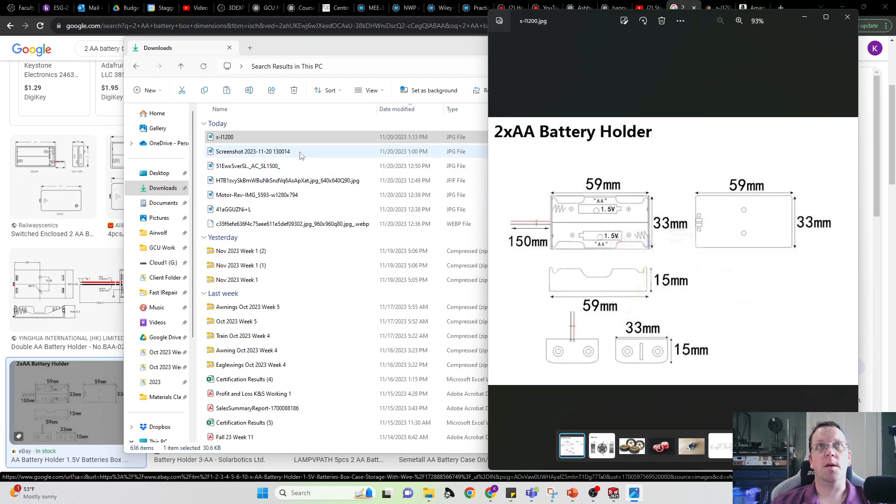I've added a number of different materials, so let me pull those up, along with a number of specific drawings. So, AA battery holder—this one's a pretty important one. A lot of you are going to have to account for this in your volume, and you're going to have to make each part in your team. Now you'll have dimensions for these attached to the announcements.

Similarly, the two-wheel drive wheel—these are roughly the same size as everything we're using. You should expect them to look something like this with black tires, so they're not going to be as nice or fancy as these injection molds, but the tires are going to be the same model as this, unless they've started doing more 3D printing of tires, which I kind of doubt has taken place yet.

We have a kind of simple three-spoke design similar to this. Maybe we have some more options—we were starting to experiment with 3D printing wheels the last time I was involved in the project.

This is what the actual motor, the dual drive motor, looks like that you guys are going to be using. I've given you some specific motor dimensions here. This is a side view—you have positive and negative on either side of this. So you have a couple of key parameters.

2 millimeters here is your shaft diameter. 6.1 millimeters is this front coupling, so this shroud over the front—6.1 millimeters outer diameter, 6.15 actually, and then a 1.7 depth.

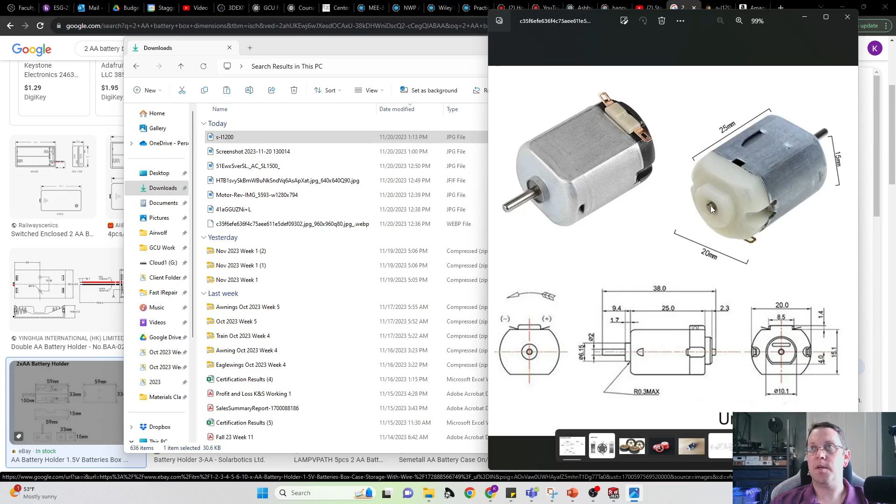These are important figures to know because you need to have something that the front of the motor butts up against in order to hold it in place, and then something that holds onto the back as well. The back looks like this, and across all models and types, the difference is how far the shaft sticks out if it's a double-sided drive like this one or not.

So neither of these account for the dimensions, but the numbers on this one were a lot more clear. The overall dimension is going to be a little longer—A is going to be longer for the double-sided drive. It's 38 millimeters for the single-sided drive, but this is about 9 millimeters instead of this little 2.3. So another about 9 millimeters out the other side, 9.4 or so, will get you about the correct dimension here, and that'll give you a reasonable range for fitting parts.

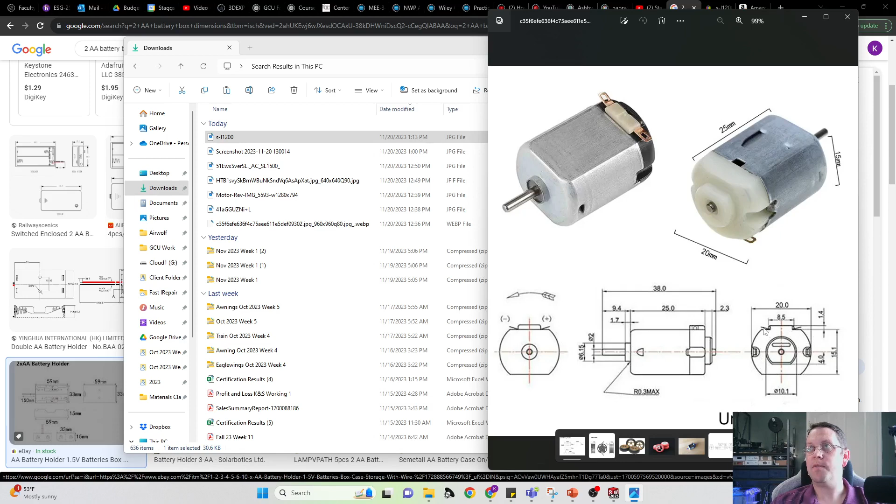D shape, so 10.1 millimeter diameter with a 4 millimeter cutoff to the D shape. All of this stuff is stuff you guys know how to do. The actual height of the motor itself is not completely round, so it is 20 millimeter diameter, but it's not actually a diameter—that's actually the width. So these are arc segments. Getting the curvature of these right is a little tricky, so you need to pay attention.

This maybe does a little bit better job of representing it, but that's kind of your starting point—15 millimeter height. You'll have to do some matching to see, okay, does that angle look correct?

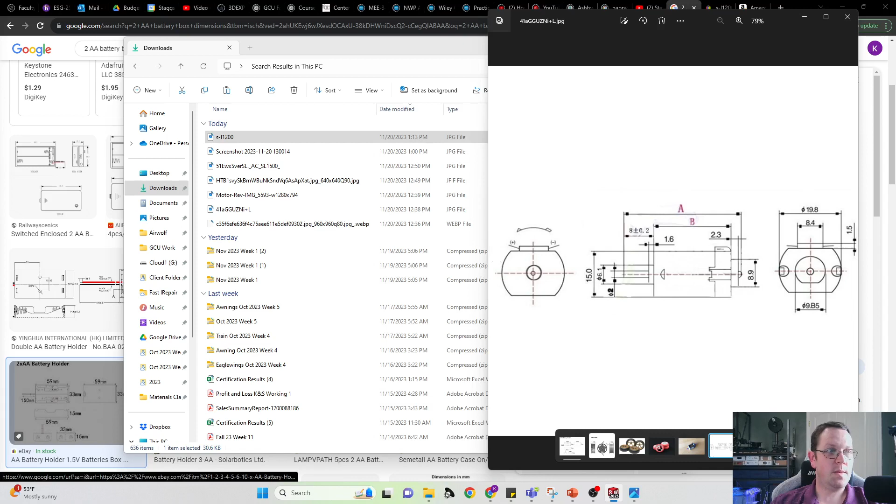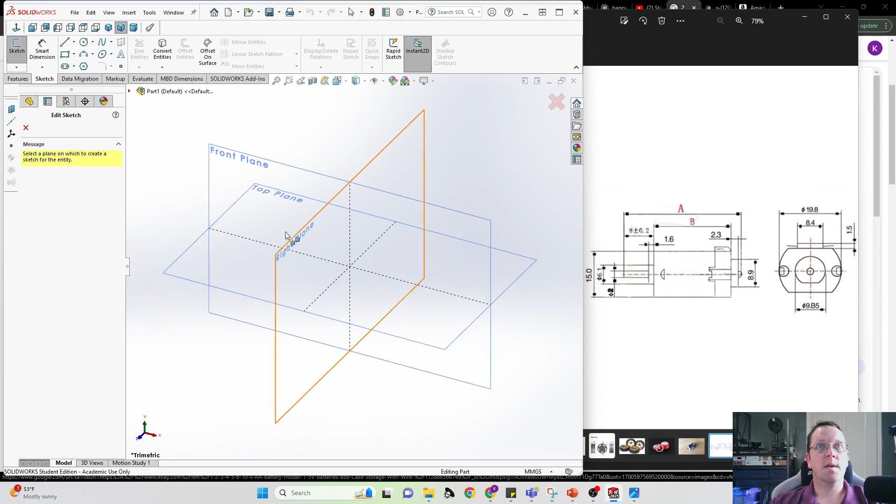So when you go to draw it in SolidWorks, the trick is going to be something like this—even if I minimize this just a little bit to give us our reference. Even if you're drawing that, you're not really going to be served well by adjusting our view plane so it's square, or by doing a set of circles. You can kind of do a set of circles referencing maybe the midpoint of the rectangle or something like that.

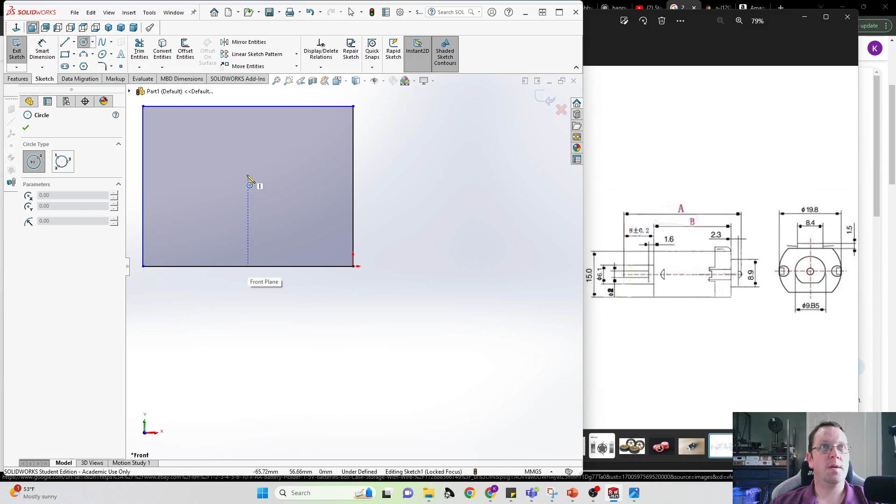Sometimes SolidWorks is there to help—there we go, it's got my reference, so I'm going to set it there. We've got one circle, and then instead of doing another circle, what you're actually going to want to do is set the arc points. So, smart dimension: set this height as your 15 millimeter, set this width as your 19.8.

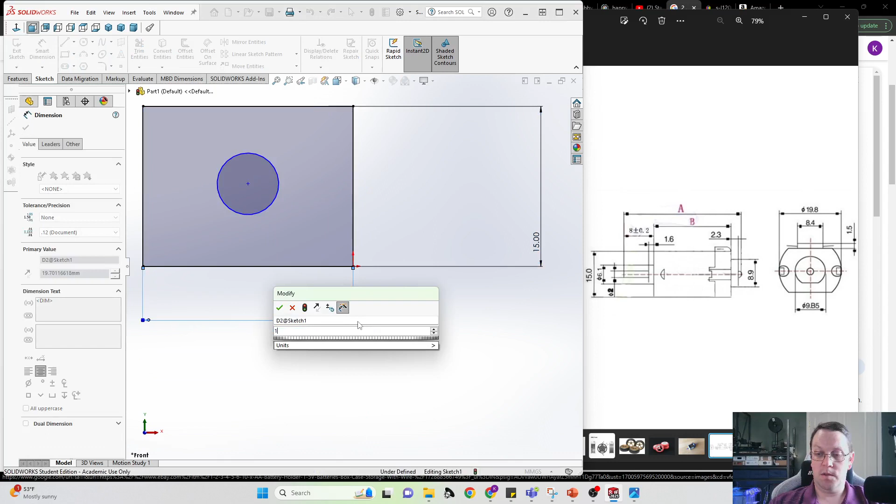This diameter is going to be on the real motors, it's actually going to be closer to 10.1, so maybe this is slightly more accurate. So, 10.1.

Diameter, and then a flat cut at 4 millimeters down. So a flat cut here, let's see, yeah, 4 millimeters down.

And this will let you do a cut to this. We also want to have a distance here. This is going to be right at, let's see, half, so it's going to be about 7.5.

Back into the smart dimensions. We're actually making movement, so we're going to be right about 7.5 millimeter, so that it's at the center. Then we're going to come in and trim entities, so that we're left with the geometry of interest, something like that.

And then to recreate those arcs, what you'll see is these arcs are related to these, so we know what the curvature is going to look like. It'll still be easiest to do like a 3-point arc, something of that nature.

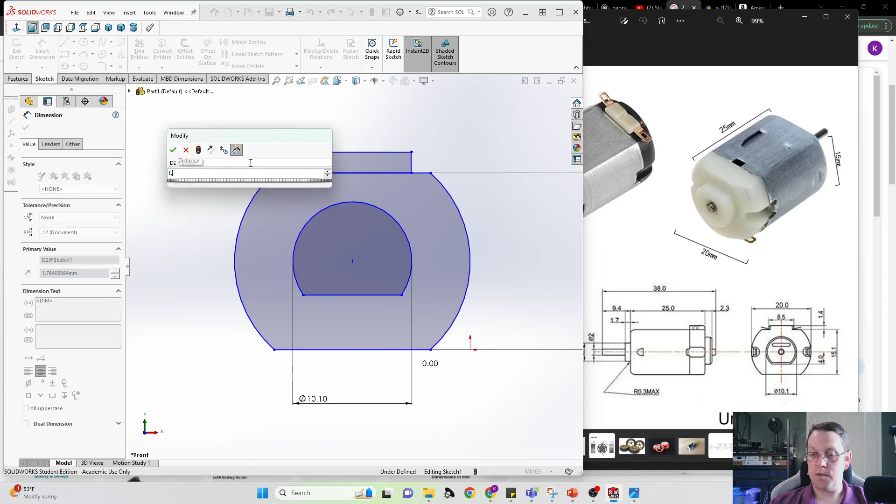And so here, even if this is 1.5 millimeters tall or so, which, yeah, I think the real one is actually a little closer to 1.5, which I think is what this says.

Yeah, nope, those are totally other components. Come on now, I don't have time for this. There we go, yeah, about 1.5 is actually more accurate for these.

So about 1.5, and total width about 8.4, so I'm going to say about 8.5. And the distance here to here, 8.5 over 2, so that it's centered.

And then we have our components. So now the only thing we're missing is that 2 millimeter shaft.

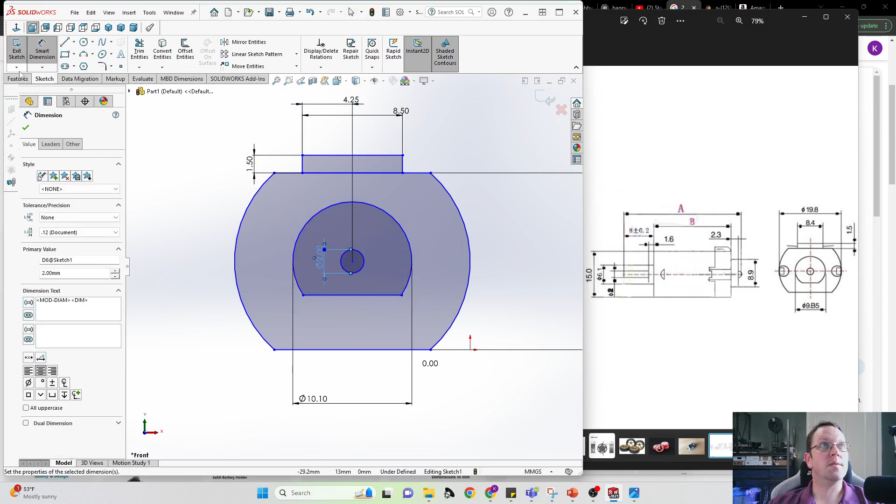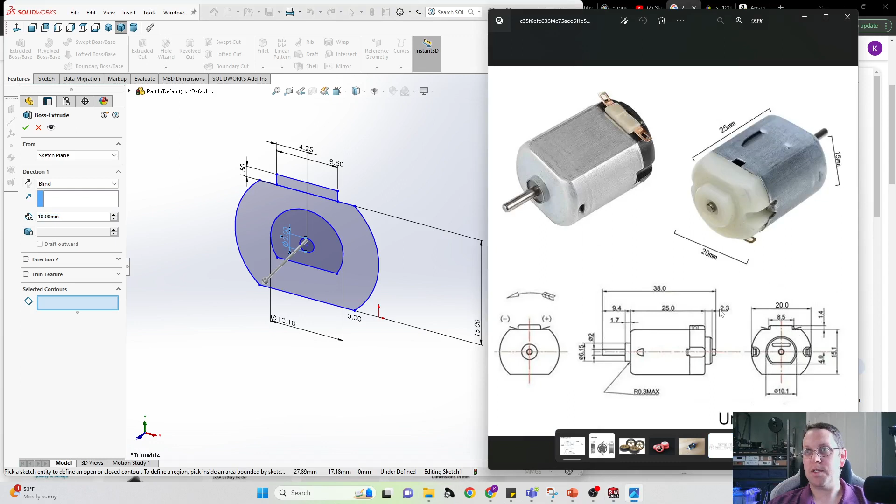So 2 millimeters. All right. Then we extrude this. So this overall length is the entirety of B. So for almost all these motors, it's the exact same 25 millimeters. So we're going to extrude this section, 25 millimeters.

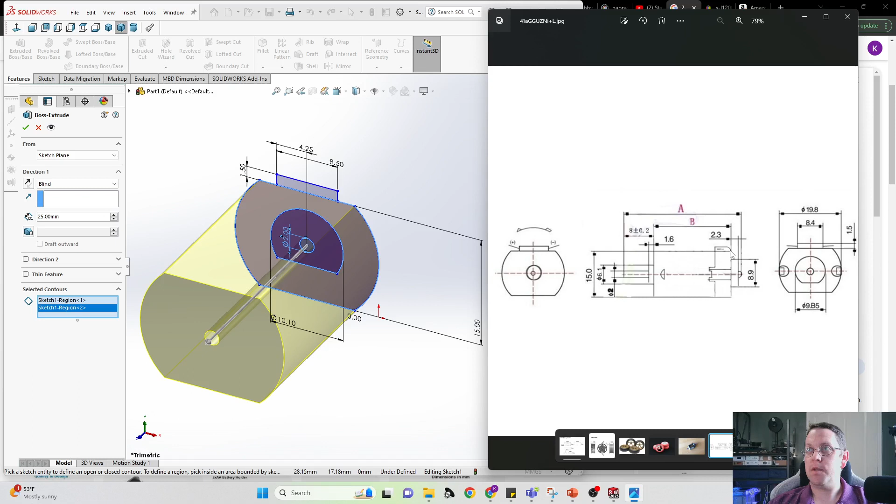This top piece only extends by, let's see, I don't think either one gives it, only extends by about this much. This is about 6 millimeters or so. So we'll start with that. Do another extrusion. So the top, since this is a little bit of a trickier part and you guys can't just go in and lay hands on parts yet, I need to verify that we've got all the stuff that we need.

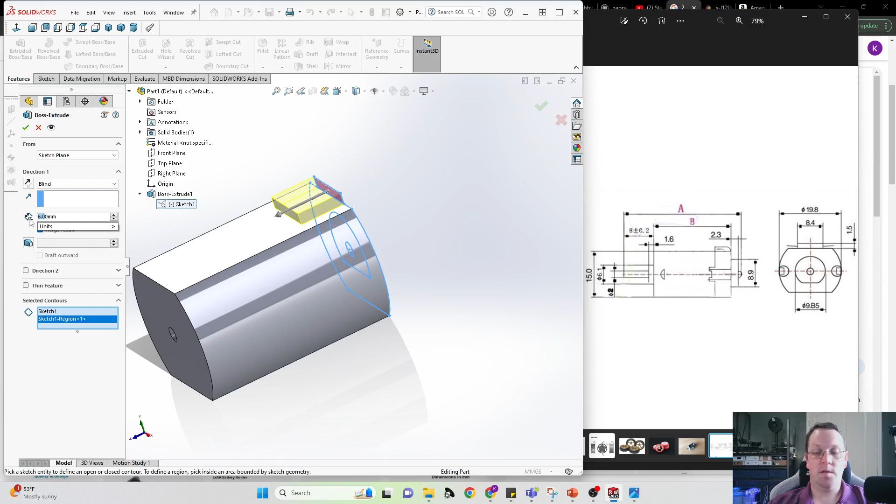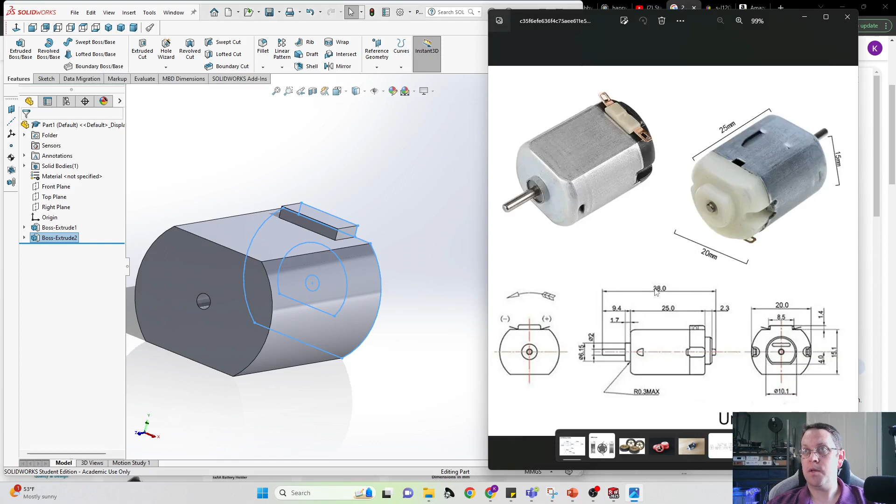Actually, it's going to be a little narrower. It's actually going to be closer to about 4.5. Yeah, that's about right. 4.5, roughly in that dimension. Overall length of that shaft is going to be from the back plane here. From that back plane, it's going to be about 34 millimeters, roughly. So extrude this central region, sketch 1, come on. This region, 34 millimeters.

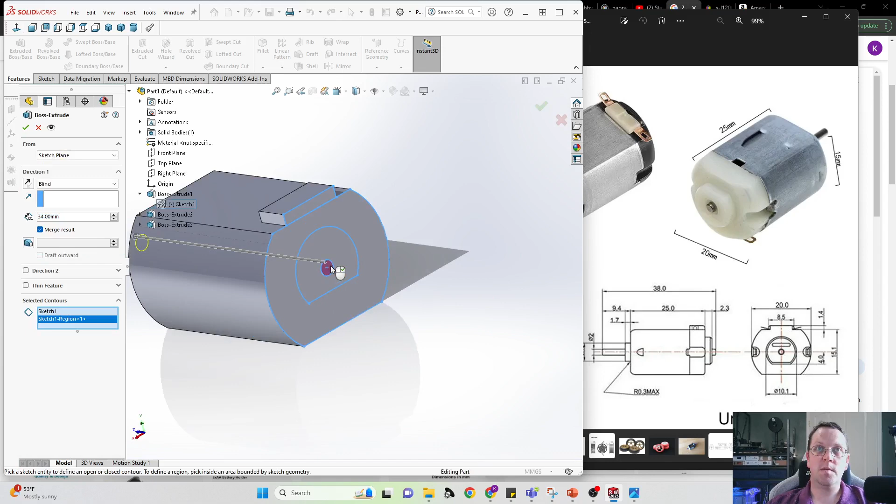So about 34 millimeters. And then another about 12 millimeters or so out the back, give or take. The backside's typically just a hair shorter, so we'll see if 12 is pretty close. Reverse direction, it's actually going to be about 10. Yeah, it's actually probably going to be about 10 because you also have the protrusion at the back there. So about 10.

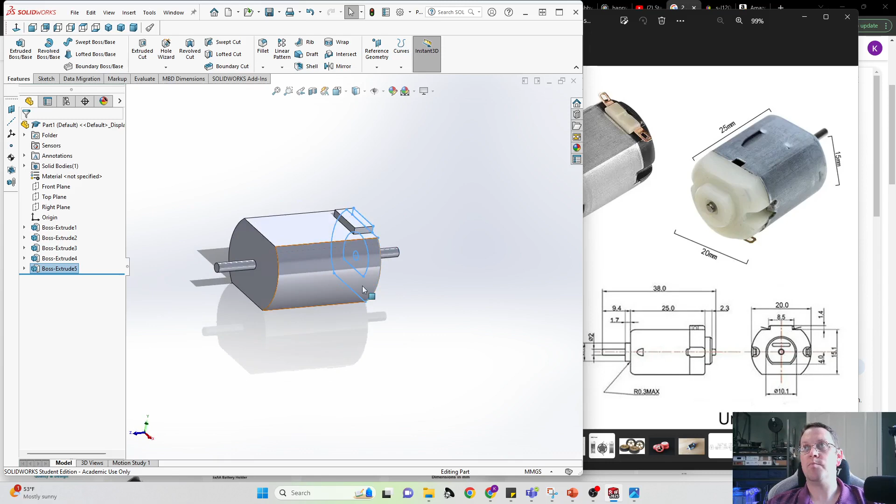One more extrusion of this base, other direction. And so this is another about 2.3 millimeters. So that's more representative of about what this motor is going to be in practical terms. There's some filleting and rounding and things that you'll be able to account for, but for the most part, this is your basic geometry for the motor. So I'm going to go ahead and save that into the group of files.

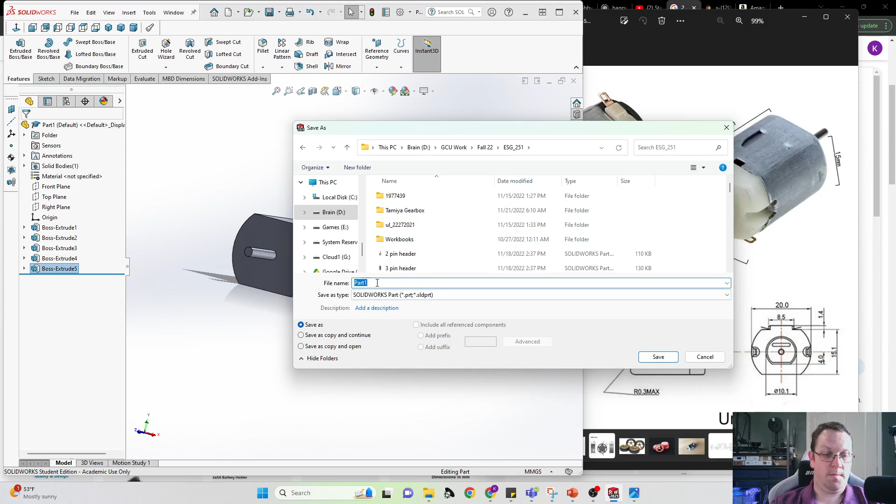Actually, so I'll go back and figure out where I've got the rest of those saved. So it might be 18. Yeah, might be in here that I've got some more of them. Anyway, we'll do... Yeah, so I'll save this to where I've got a couple of the other parts, the Tamiya gearbox and some other things, which actually I thought was here. But maybe is not. So maybe it's a different one. Interesting. Okay, here we go. So, motor, make sure that's saved.

Anyway, you're going to go through, you're going to get a couple of these parts made. So that's going to look a little more like this. So a little longer on the front end, a little shorter on the back end. You want to account for that small protrusion in the front as well. So that's factored into this length. Fairly representative of the part that you see there. There's some filleting that you can do to the front. That'll get you a highly accurate part.

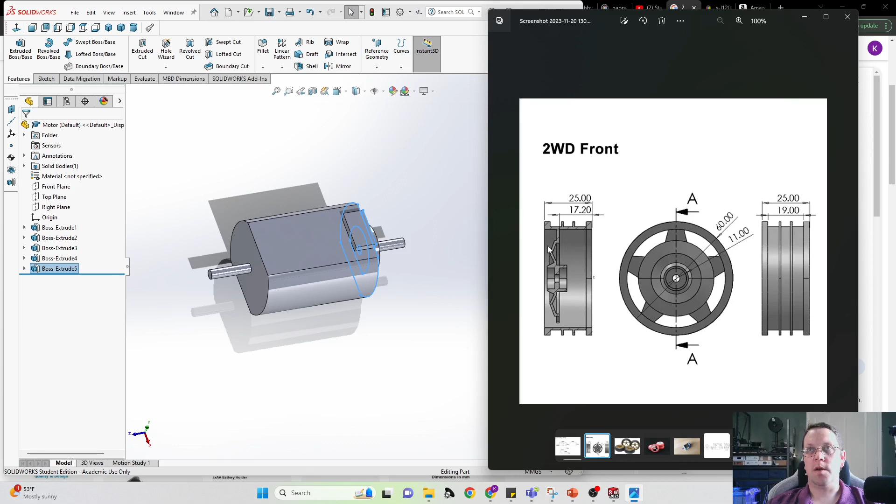You're also going to find wheel dimensions. So this is about right, roughly not quite an inch wide, but close. About 60 millimeter diameter. The design is going to be a little bit different, but this will give you more or less approximate dimensions, including sort of rim face area. So what's called the back spacing on the wheel. That's about right for a lot of the rim designs. So that should be pretty accurate for what you've got.

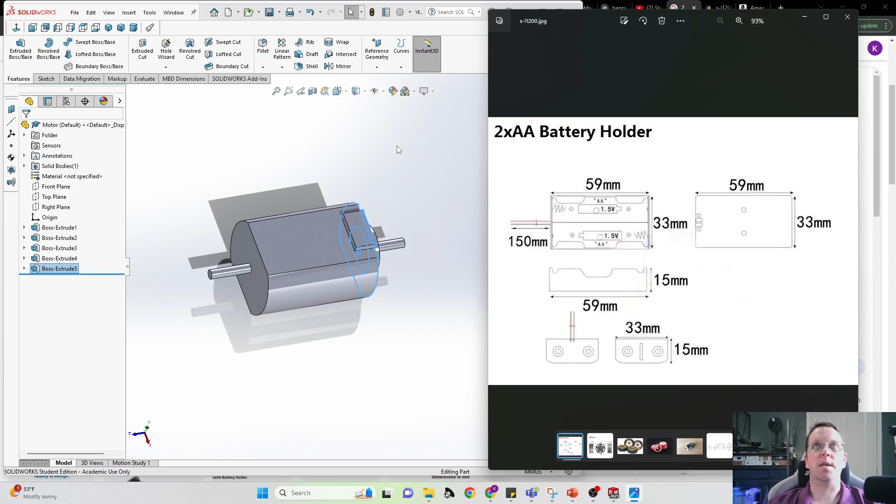And then create your battery box. These edges kind of curl up and around and match this curvature. So things to keep in mind. This will at least give you a pretty good idea what the dimensions look like. And then you're going to put together your chassis. So keep in mind here again, when you go to do chassis design, simple things that you can do to reduce the amount of time that it takes to print, and more importantly, reduce the likelihood of failure, is start with

something like a rectangle, have another rectangle off the top, and then do some rounding of things. Then you're also going to want to do across the whole back edge. Maybe it's even on this outer edge, in order to give yourself some material to work with for heights on gearboxes as well as axles. You're going to want to do something like these bars all the way down. And for your motor mount, you might want to do some kind of offset block for your motor mount.

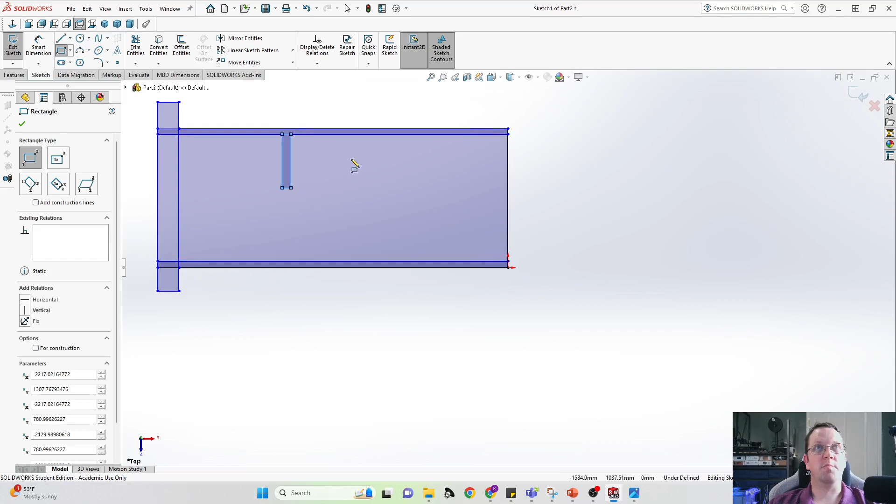And then you'll have a forward section, maybe like this, for your gearbox, a matching section back here for holding up the gearbox. So you might have something of this general variety. Some of the tricks are going to be keeping in mind at the back, for instance, you might not have enough room.

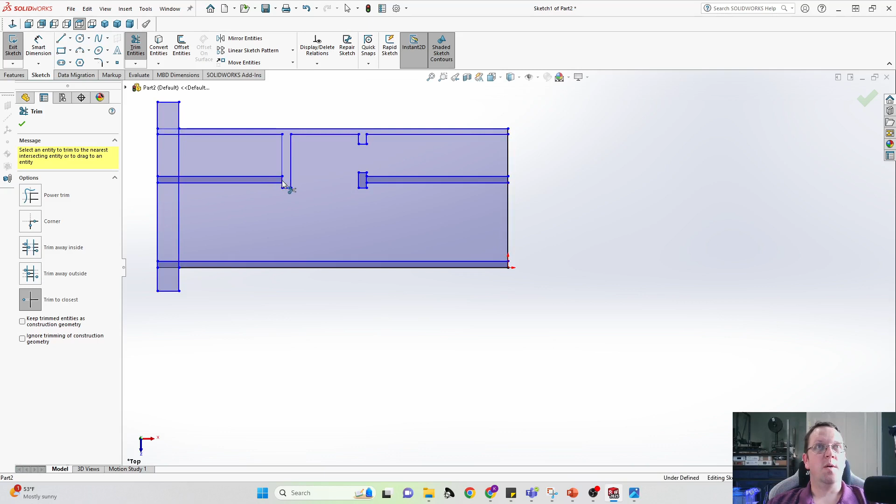So you might have to make a cut here and make a cut here. And then trim these two pieces out. Trim that out. Maybe not trim that out. And what this will do is this will allow sort of one continuous part. So you do extrusion. This whole plate really only needs to be about 3 millimeters thick.

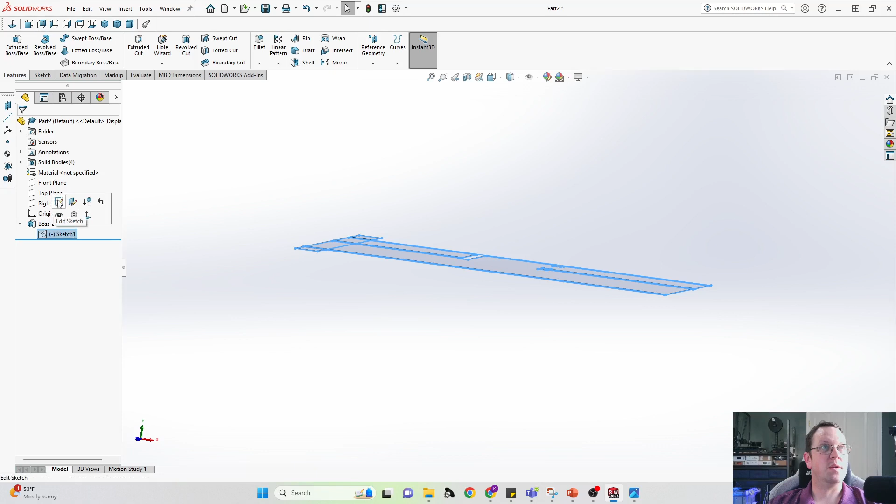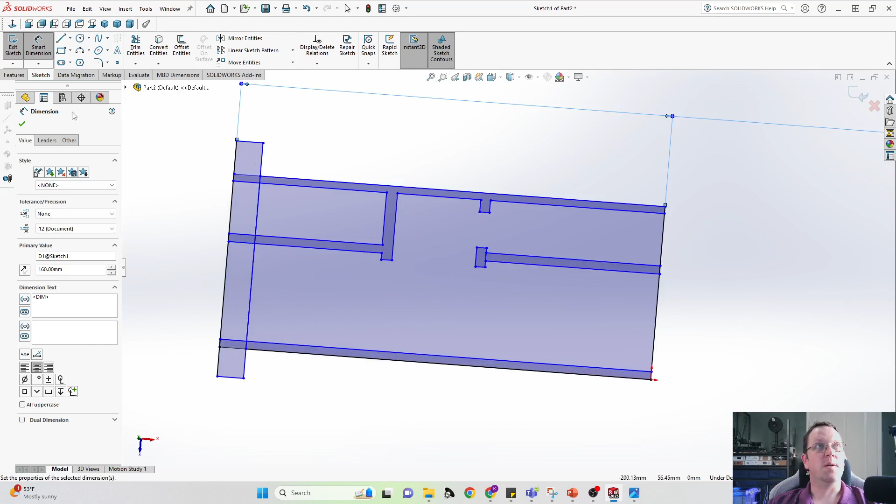We're going to reorient the total dimensions, kind of go back and edit this sketch, and the whole thing has to be less than like 170 millimeters anyway. So if we rescale this to be 160 millimeters in total, then when you lose your part, you go back and hit this button, zoom to fit. There we go. Exit the sketch. Now we have our base plate.

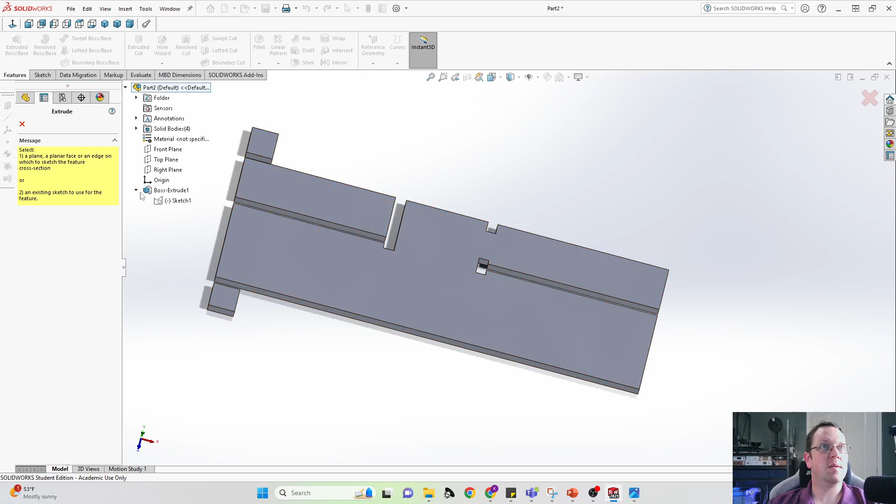Now what we can do is one more extrusion and create our walls for mounting axles and all the other components. So we come back in and we grab these regions, no thinning feature. So we grab this region, this region, this one, this one, this one, that one again, grab this one, and this one. Now, if we bring those up by, I seem to recall you need something like 15 millimeters or so. So get rid of this contour. So there we go. Something like 15 millimeters gives you something to work with.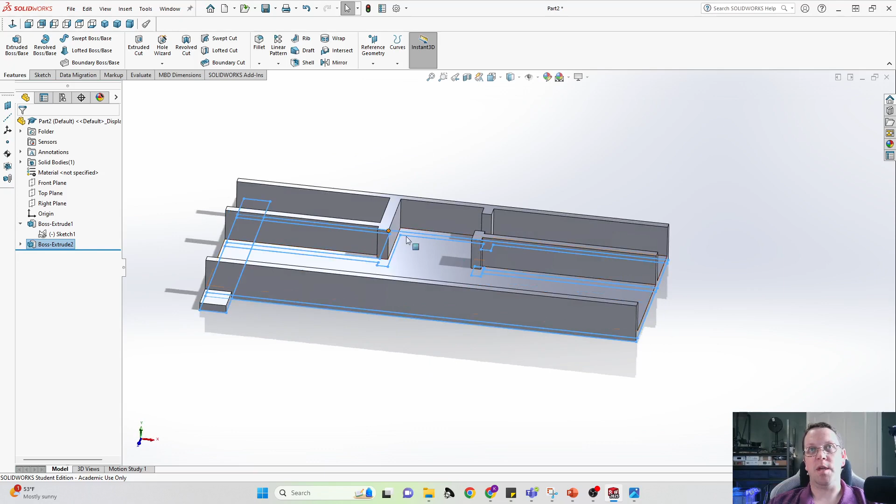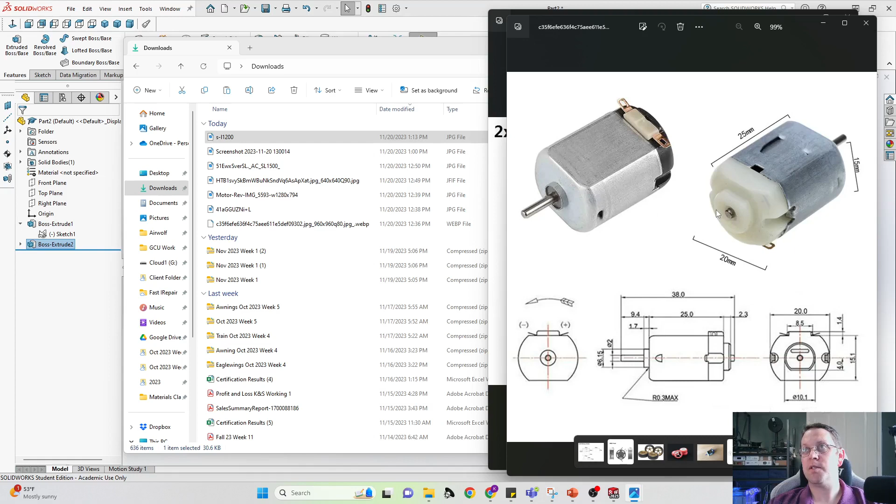And then more importantly, what this does is this allows you a space to drop the front edge of the motor in and slot the back end down into place, but have this spacing be kind of a friction fit so that you don't have to use a lot of glue or anything like that. So the front nose of the motor right here will drop into a circular hole designed to be kind of a snug fit. And then the back end will be designed to just barely touch either side of this. And it'll be a real snug fit. Plus, that'll mean this chassis prints quickly compared to a lot of other designs.

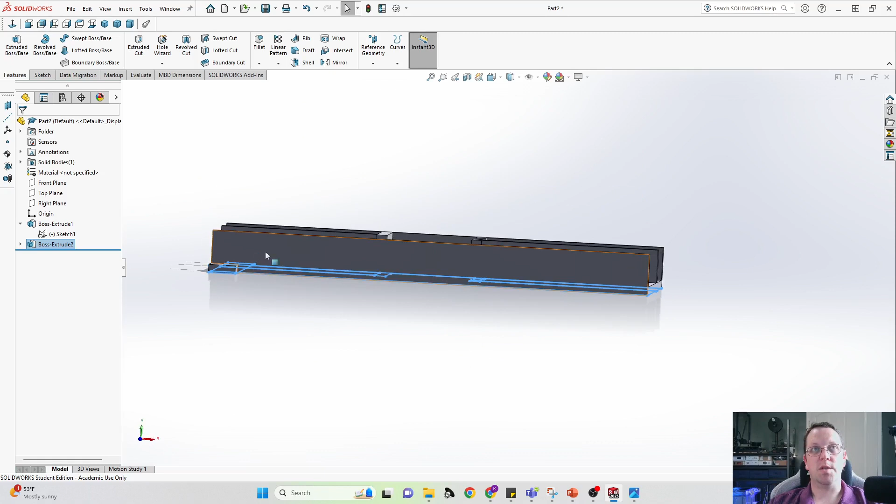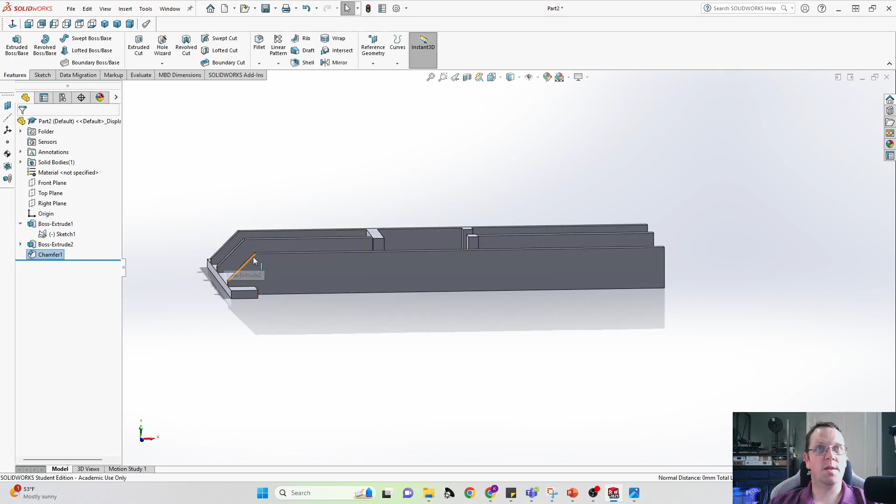And then you'll also have to do some cutouts for where the gears are going to be on the bottom. That's fine. But if you position things low enough, you can also do things like taper these front edges. So you can do a chamfer on these front edges. So not that one, but this one. So you can do a pretty aggressive chamfer on the front as well as on the back to give you some clearance for body stuff and whatever else. There's a lot of options for how to do that. So you very quickly get to a sophisticated design.

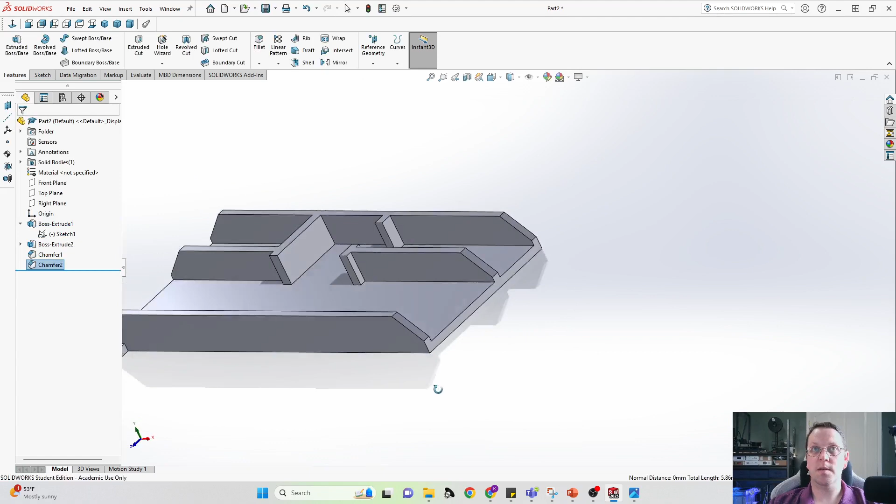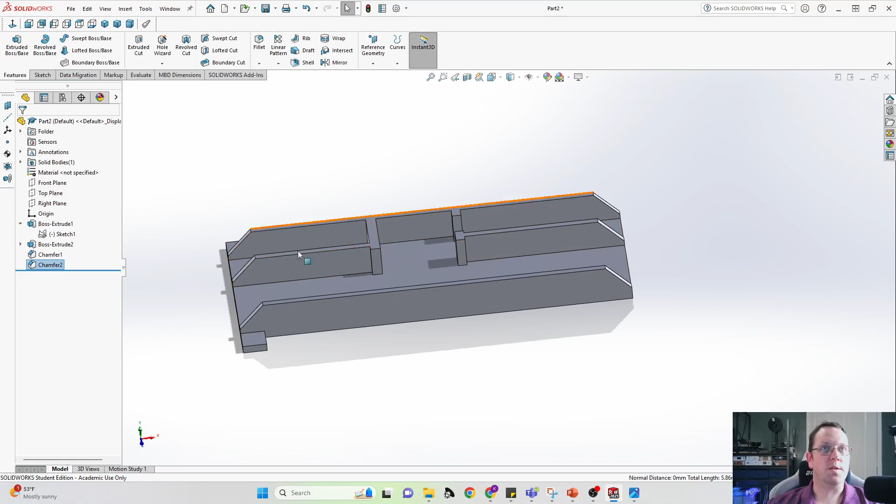Chamfer there. Okay. You very quickly get to a sophisticated chassis design, and then you just set up your through holes for your gearing. Make sure your spacing is correct. Make sure you've got just enough clearance where you want the holes to be almost like a real snug fit. You don't want them to be loose and flopping around because you don't want to have to come in with hot glue and make a royal mess. And what that does is leaves you a lot of room on the other side for your control board and for your battery box up here.

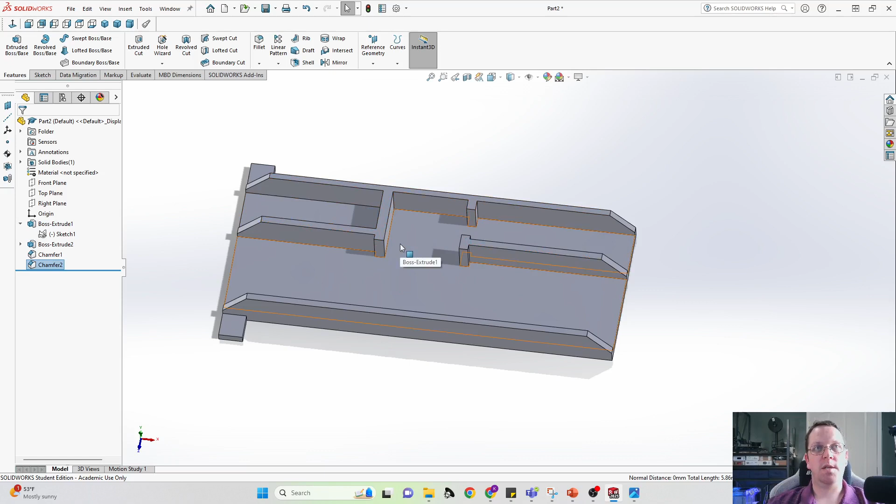So you might have to orient things a little bit carefully, but this should give you enough of a clearance starting point that with the dimensions of the battery box, the motor, and some of the other things, you can start putting together a template for what your chassis will look like. And then for the body, what you want to do is get some key measurements and then design that over the top of your particular car.

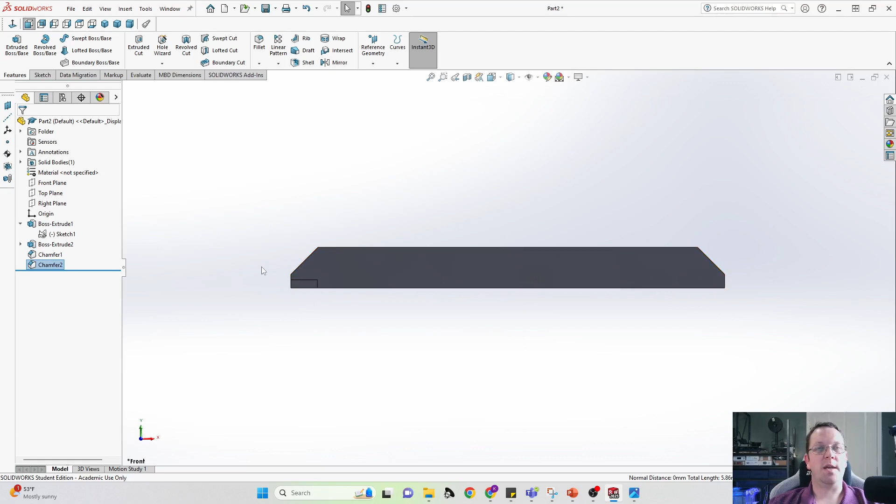So you could very quickly do something, because a lot of students don't really understand, well, how would I do that? Well, you would start with something like the dimensions of this in the back end, and you would do another sketch, and let's say we do it on the surface of this.

So we start a sketch and we say, all right, maybe we want it to look something like a 30s Roadster or something extreme, and we want it to look like something out of a cartoon and have wild flared fenders like you might see in some kind of crazy Bugs Bunny cartoon, or have it come up to a crazy point because race car.

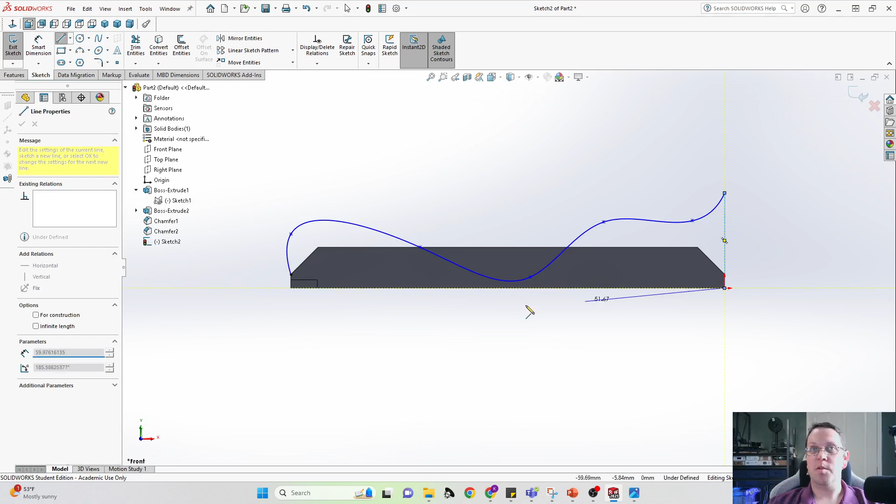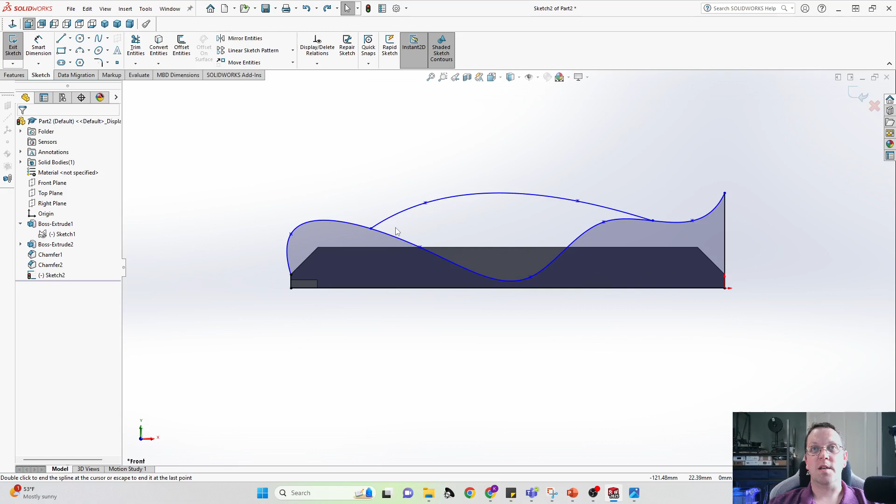So you bring this forward and up, and now you have an enclosed space, and you have maybe two portions of this. And because we're doing 50s car styling, maybe to give you enough clearance, you need to do something. Let's see, let me go back to a spline or some kind of curved geometry. So maybe you want it to look something like a stylized version of a Roadster or something, right?

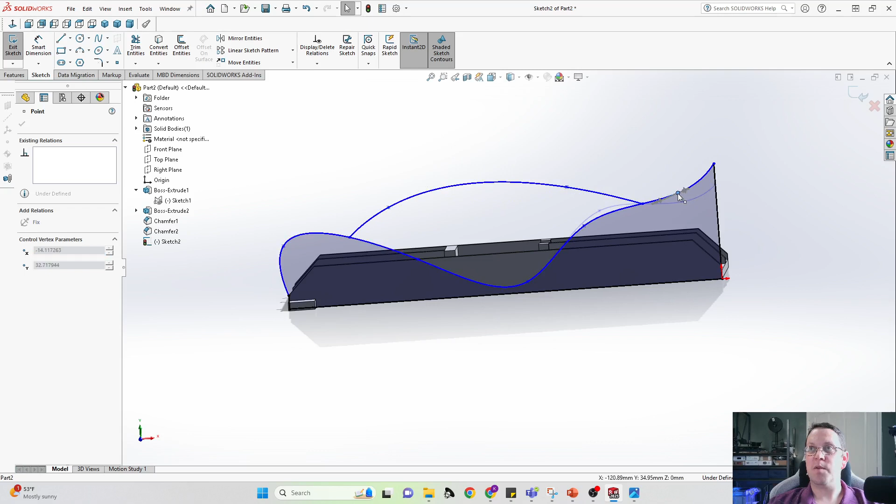What you can do is an extrusion of this geometry, and you could cut the pieces of this that you don't need. So you might need a little bit more space at the front edge in order to get the room that you need to clear gears or whatever. Maybe back here it's the same kind of problem. You need to bring it up. Maybe the same thing is true for this, and it needs to be a little taller to give you some more clearance for gears. That's fine.

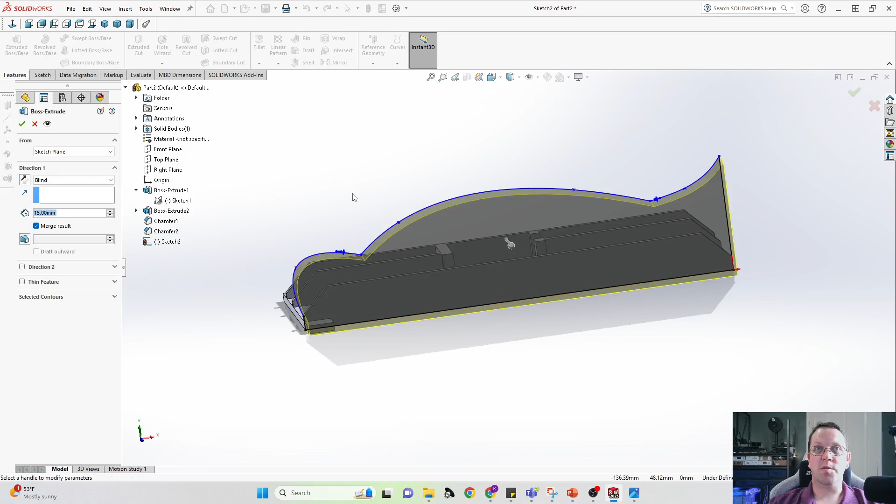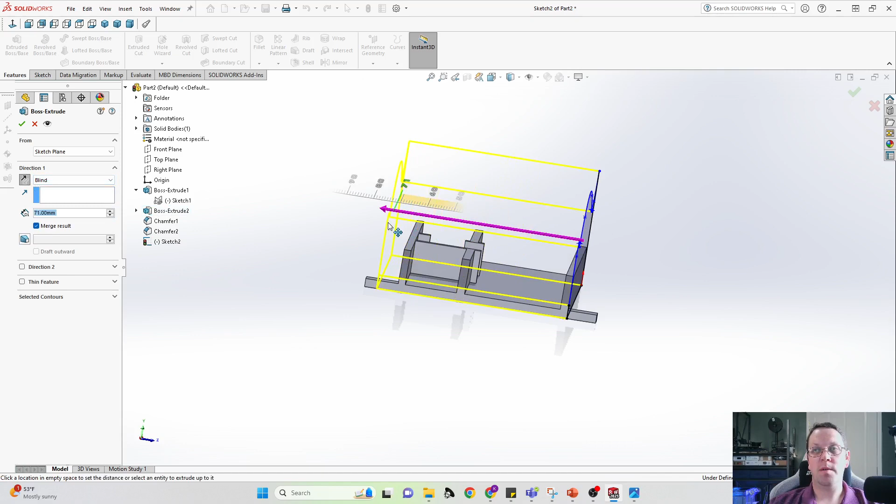So then you can come in and trim the internal entities, do a simple extrusion. So you could do an extrusion of this all the way across, up to this surface. And what you could do is actually make it just a little bit wider. So change it back to a blind extrusion and give yourself a little bit of room internally. And then you can do a shell with a couple millimeter thickness or something of that nature.

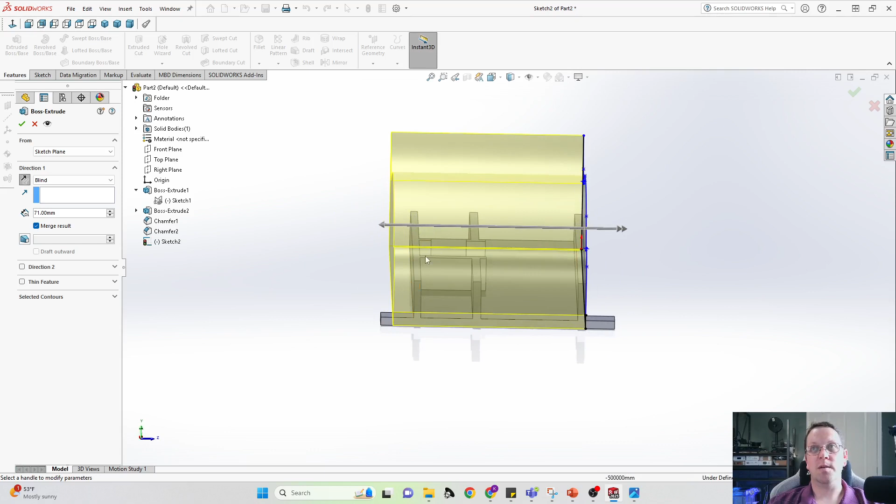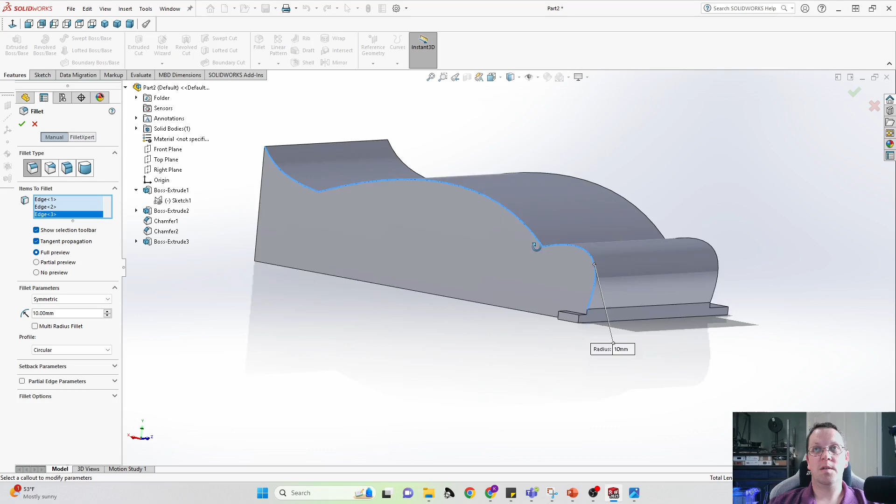But you would then need to do some sculpting on the sides, and we can show how to do that in a reasonable way. So if you did this, now we come back in, we do some filleting along that curved edge. And it might only understand how to do this in single digits. You may not be able to do something extreme. 10 millimeters probably compromises the geometry. 4 is too much. 3 is too much, but it understands 2. So 2 millimeter fillet on that side.

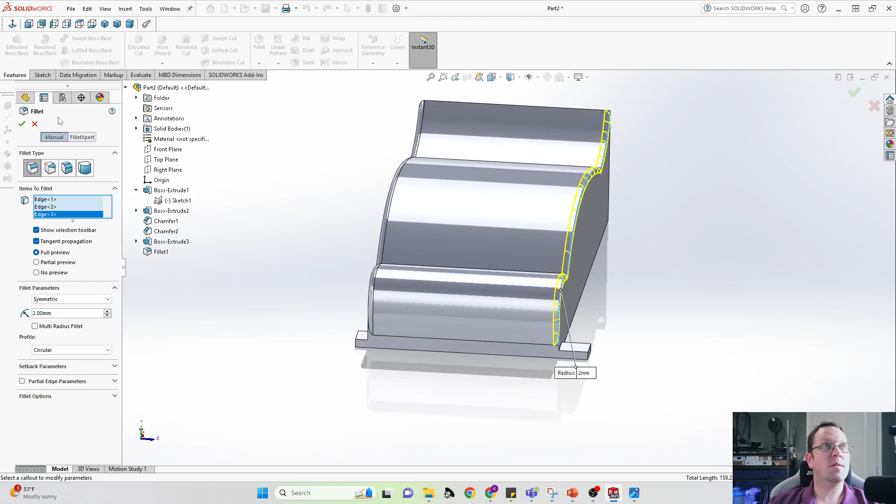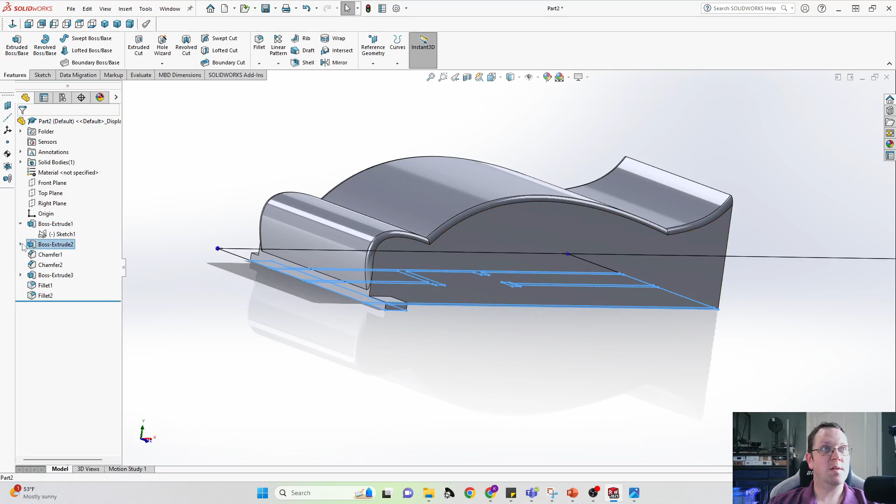Same thing. Fillet again, 2 millimeter on all of those edges, to round the edges of the body just slightly. Maybe up front here, you wanted a little bit more, a different profile. So we go back to sketch 2, edit that and say, I really didn't like that. Maybe I wanted to drag this in and have it be more race car. Something like that.

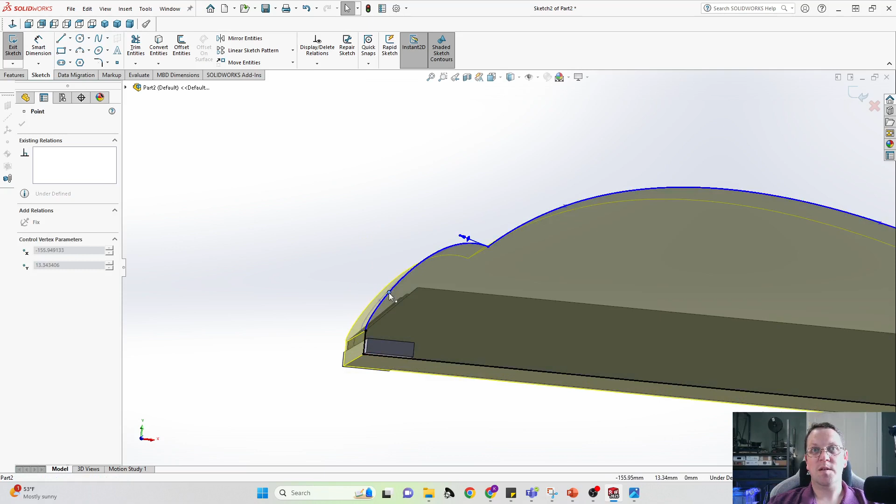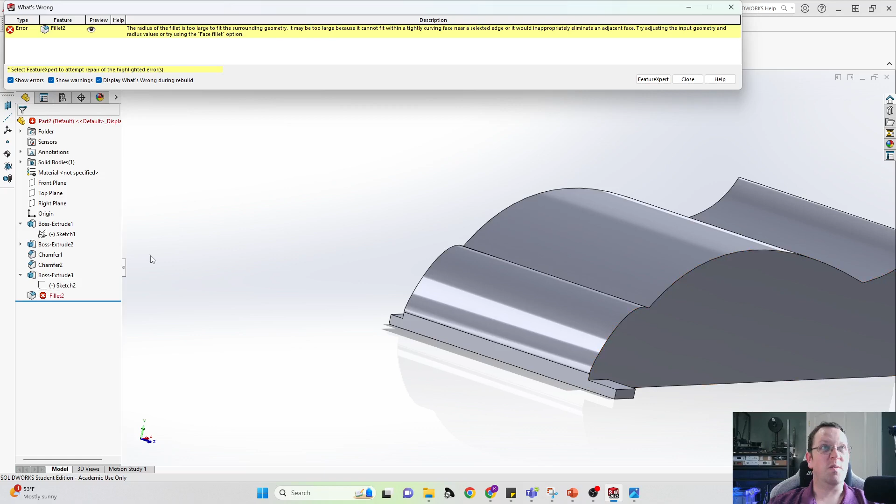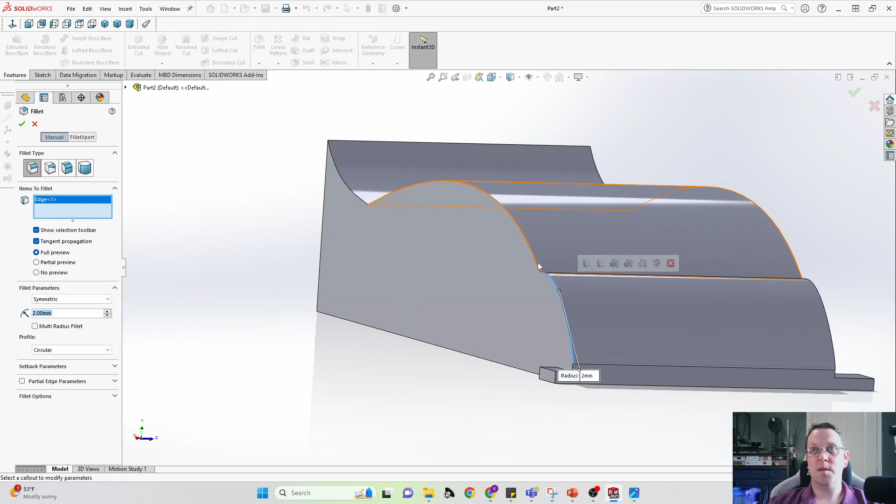So keep in mind, if you do a zero clearance design like this, exit the sketch. If you do a zero clearance design, we undo and delete the fillets because they have no reference. They've lost their curvature reference. So now maybe it looks a little more like what you might expect, but you still want to go back in and do fillets. So you do this edge, this edge, this edge.

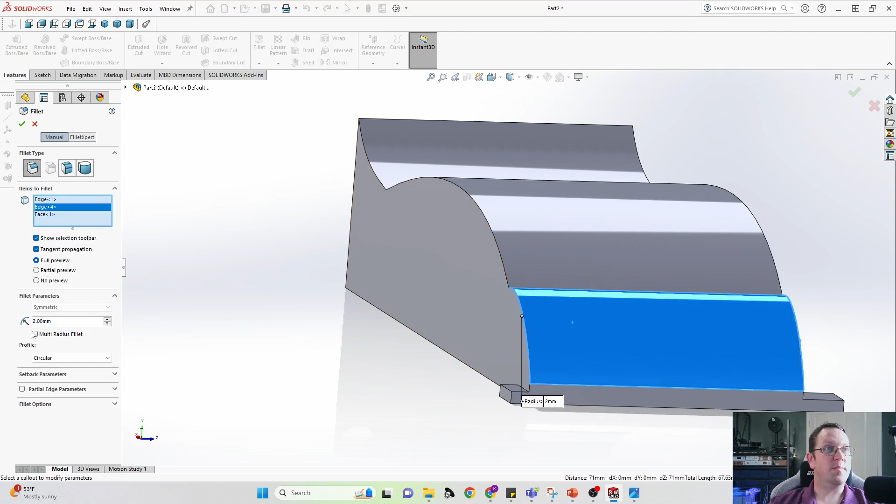And now maybe it doesn't have enough idea what to do with the geometry. So you clear selections and you pick maybe just this, or you click the front face. There's a couple different ways to approach it, but maybe it only has context for a 1 millimeter. And it might not have context enough for any filleting on this edge.

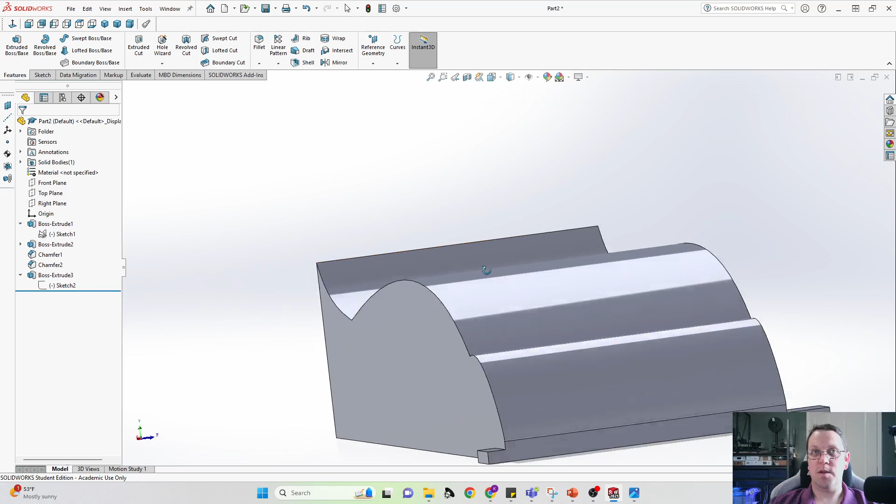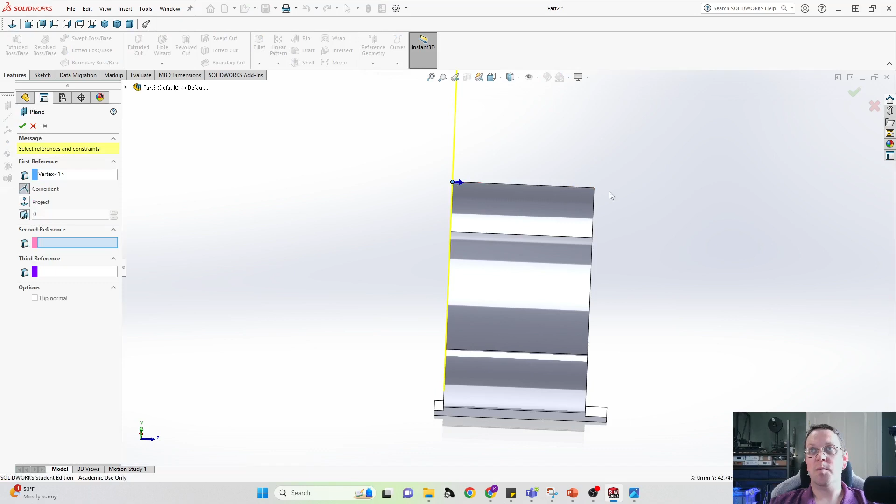But now you can start playing around with, okay, do we want this to be some kind of a wing design with a through hole or something like that, right? Do we want this to have an exit? If we want to do something really complicated, we add in our reference plane. We're going to pick 1, 2, 3 points.

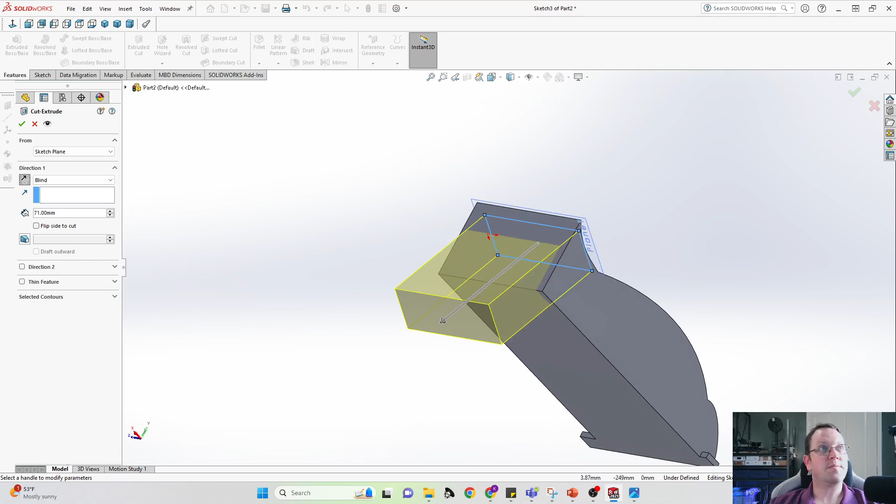We're going to sketch something like that, and then we're going to do a cut. So if we do an extrude cut out this way, it'll provide some mechanism for airflow. So if we now do an extrude cut, flip direction, because maybe we want the back open on our design, right?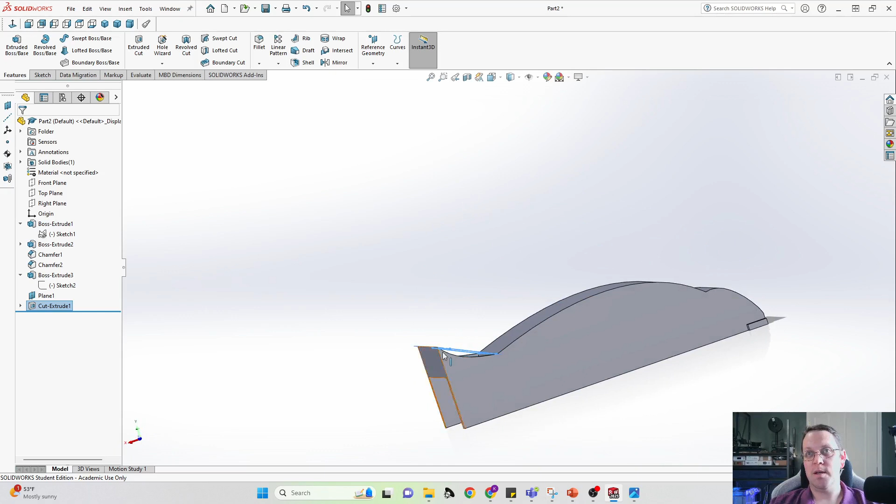Maybe we now need to do some more extrude cutting, or we want to take this whole concept and turn it into a shell or something, right? There's lots and lots of different options for how you can do kind of a cool design based on a presentation like this, where you've got some kind of a curvature.

You know, if you wanted to, you could do windows through the whole thing so that you could see inside. There's a lot of flexibility and options that you would have for this. So don't do lazy geometric shapes, actually try and make something interesting out of this process. So this will give you some inspiration on how to do this.

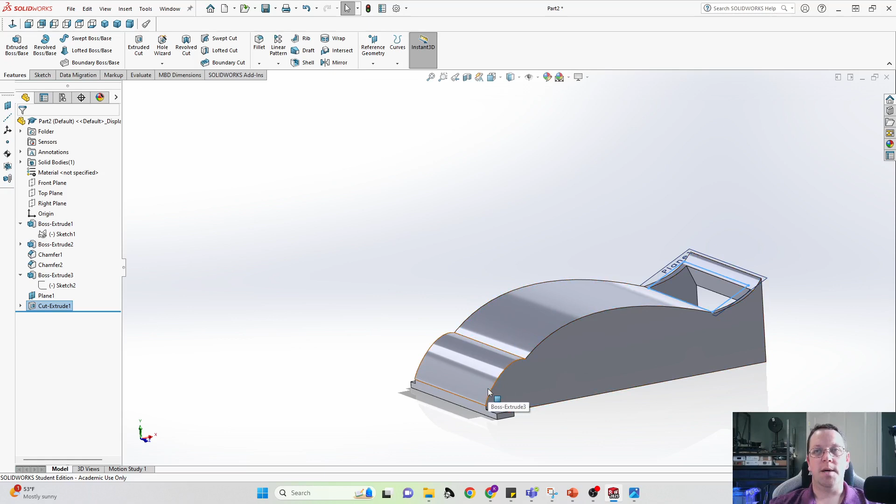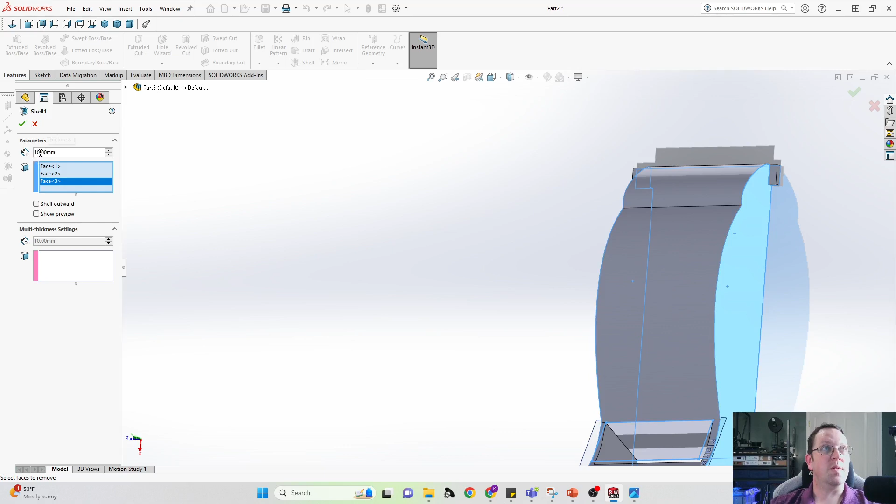You'll want to make it as a second part using the same kind of dimensions, because when you create the part, you'll want to make sure that it is in fact a shell of the part. And so all this stuff, we really only want a shell thickness of about 2 millimeters, maybe 3, something like that. Something like 3 millimeters is very strong, very rigid in terms of 3D printed components.

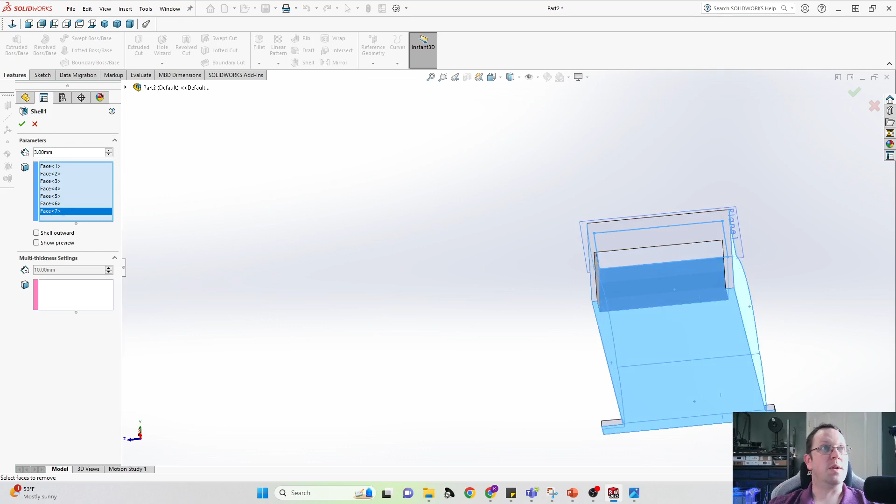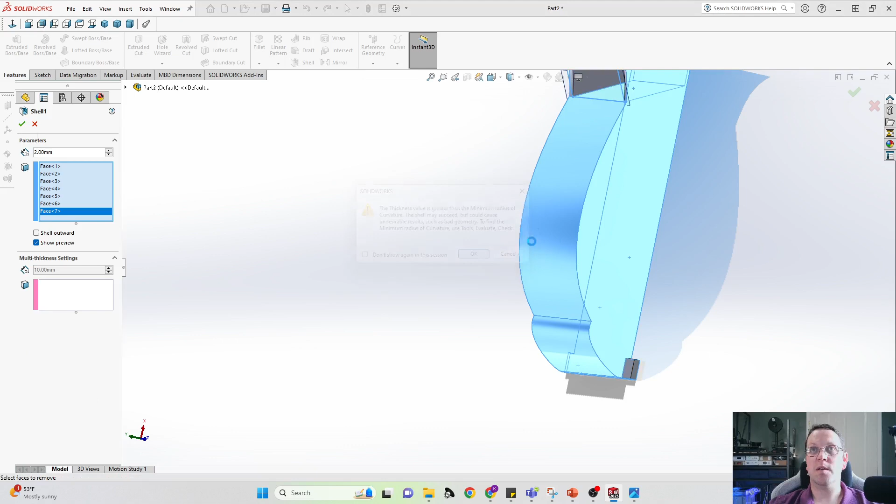So show preview. Let's see if it can. It's going to throw me an error, you watch. Yeah, there's a minimum radius that's available. So 2 millimeters. Same thing. So you may not be able to use the shell type. You may not be able to use the entire thing.

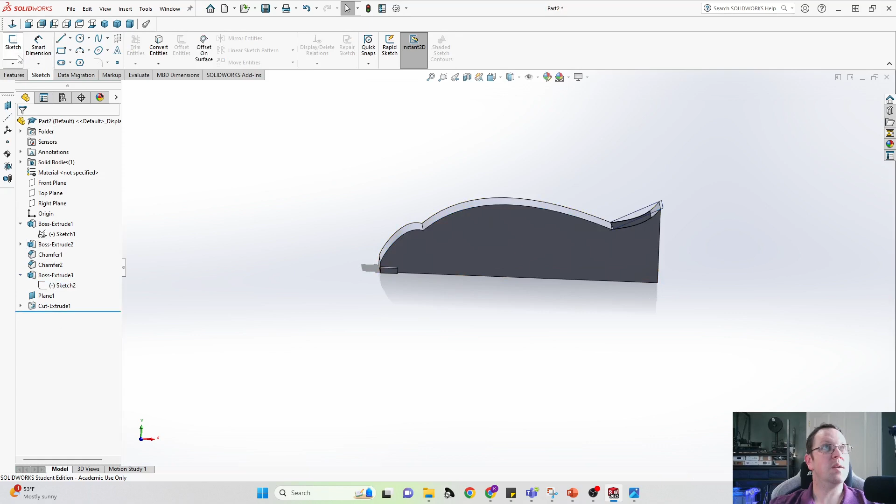So what you might need to do in that case, if you're stuck with something like that and you're trying to figure out how to do a shell and you're wasting a lot of time, go back to this sketch, or even just add another sketch. So exit that sketch, add another sketch on this surface, offset entities. So get rid of that. And now bring it to the inside, reverse, and make it something like 3 millimeters of the reverse.

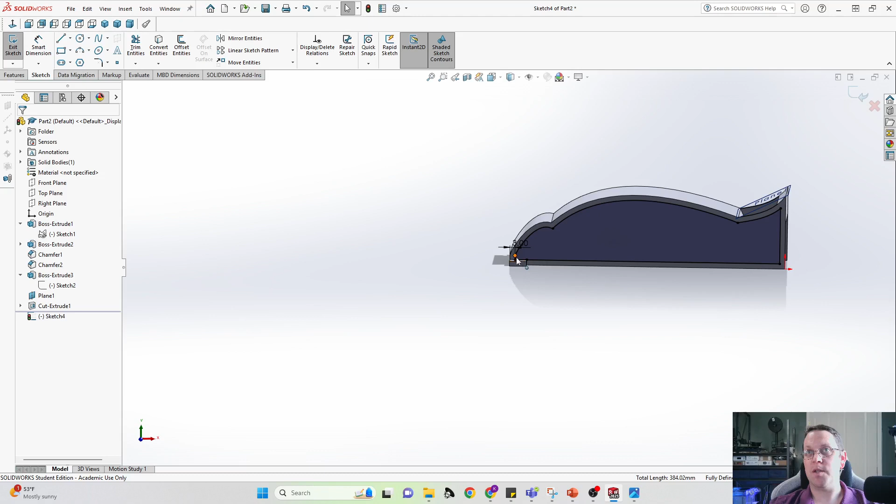And then say, all right, based on this, we know we need some sort of cut through this way. We know that we're going to need actually a cut all the way down through here. So we actually are going to bring this whole thing down to the base and up. And we're going to cut this false base out because we don't need it.

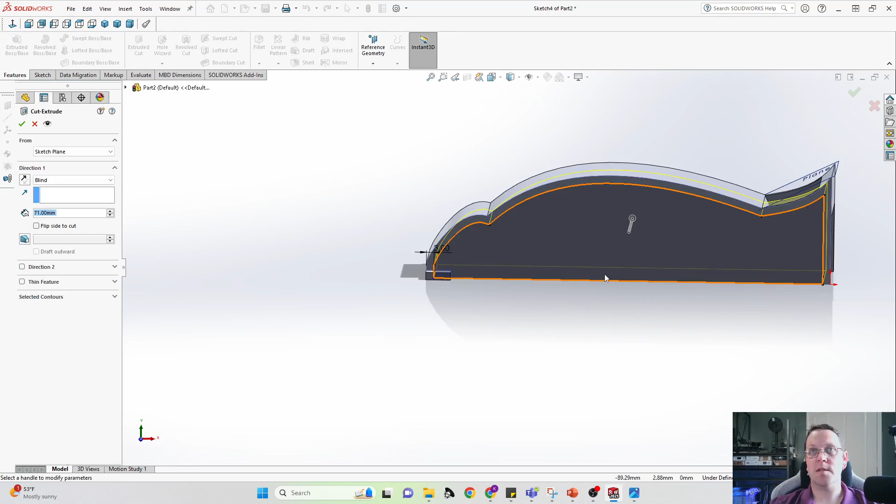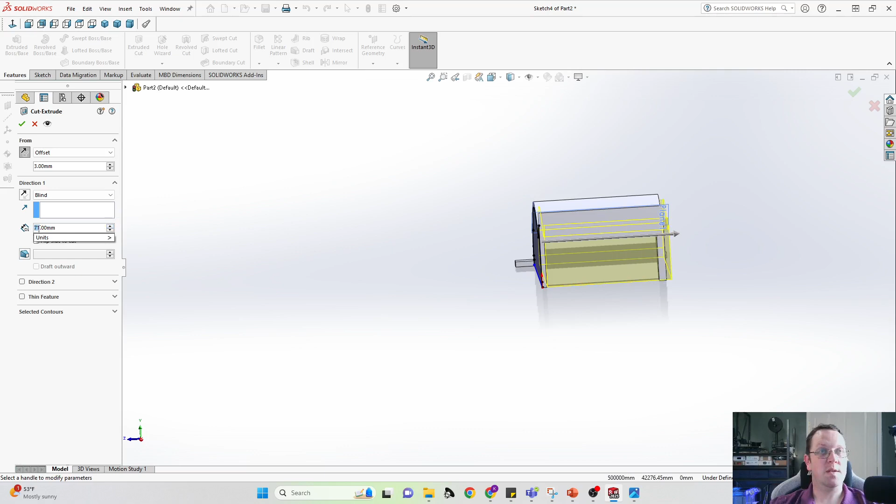And we do an extrude cut with an offset of 3 millimeters to give us thickness, and leave about 3 millimeters offset to the other side and give us 71. So 71, it's pretty close. 71 is actually just maybe one more than we need, because I didn't set an exact dimension on that, but that'll get us close enough. So now we have our empty shell underneath.

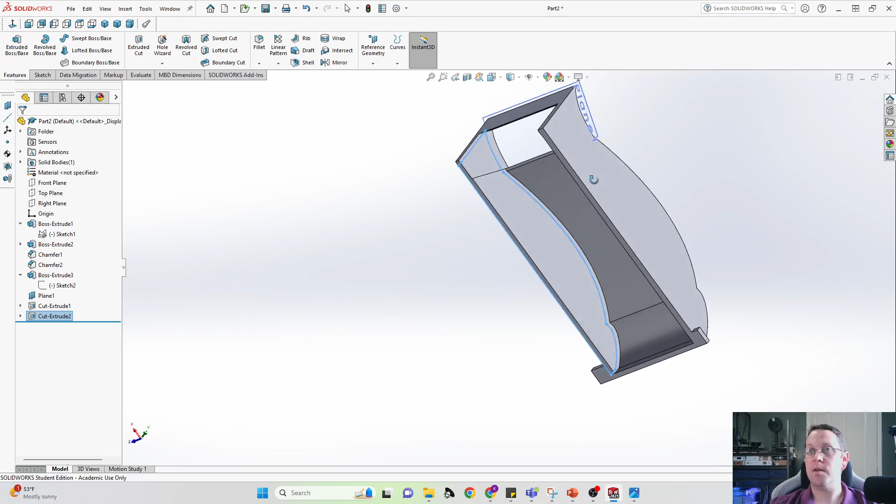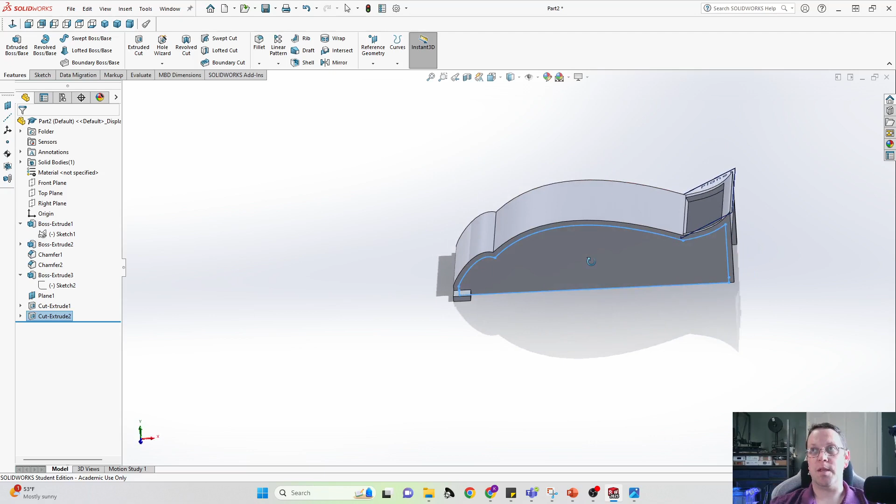Okay, and now we could put this down on top of our body, if we needed to cut another access port or something for getting to our switch gear, or just mount our switch gear cleverly up under here on the underside of the wing, whatever we're doing there. There's a lot of options on how to make this a little easier on yourself. You might have to make a hole for cables or something. There's some playing around you'll have to do there.

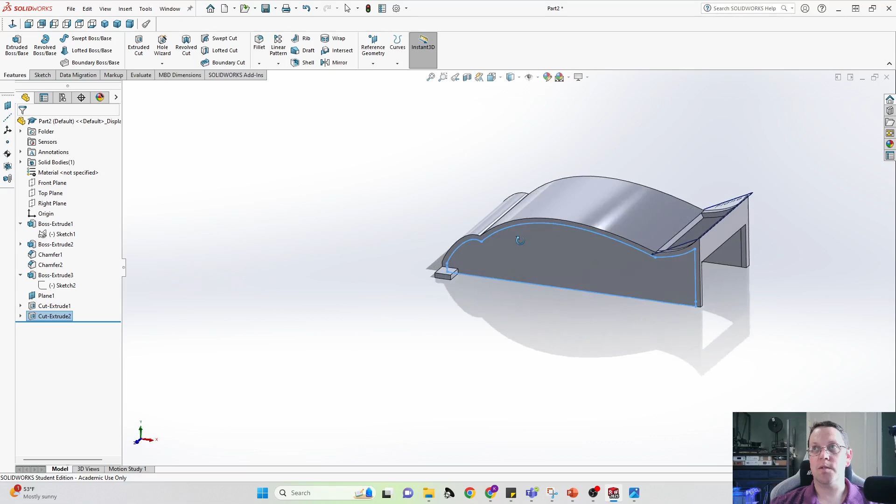But you can do a few different design revisions, and then there you've got a simple, interesting looking body shape instead of just a rectangular block, and one that's going to fit fairly nicely with the way the wheels are going to work. So this should sit on top of your chassis somehow. You might have to do a cutout for the exterior part of your chassis, right? For this to really sit down on it correctly, but you have some options on how to approach that.

So hopefully this will give you what you need to do some much higher level examples of building the bodies on the chassis.